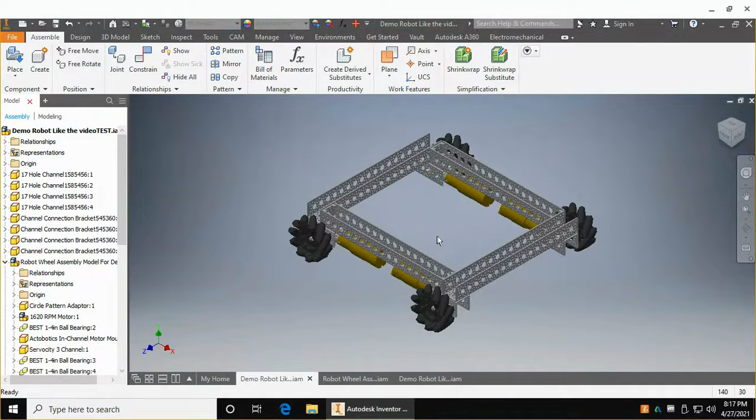In today's episode, we'll be adding our wheels and drive motors, and this is what our assembly looks like. So at the end of the last episode, check that out if you haven't, we had this here, and this is where we're going to get by the end of today's episode. So, to get all of the parts required for these assemblies, I've actually made a little slideshow that'll show you exactly what we're going to need.

So, what you'll need to do is follow the very same process you followed in the last episode to download your parts. If you haven't seen that, I really recommend you check that out. It has important beginning CAD information, and you'll also learn how to build that chassis we just saw.

So, we have, can I move this? Not really, okay. Anyway, we have, stay there, okay.

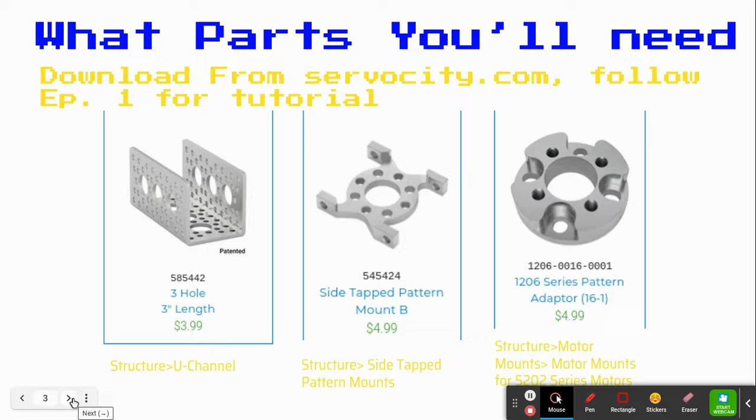We have our structure, U-channel. We're gonna need a 3-hole length of U-channel. We're gonna need structure and side tapped pattern mounts. We're gonna need side tapped pattern mount B. Also going to need structure motor mounts. Motor mounts for the goBILDA 5202 series motors, and this is the 1206 series pattern adapter. All of this can be found at servocity.com. You're going to need the step file downloads. Again, more information in the previous video.

We're also going to need, from the motion, motors, goBILDA 5202 series. I just put the 312 RPM one. You can pick whatever you want. They're basically the same in terms of the CAD model. You're also going to need the 1/4 inch D-bore set screw hub. That can be found in motion. Hubs, D-bore, 1/4 inch, and then set screw.

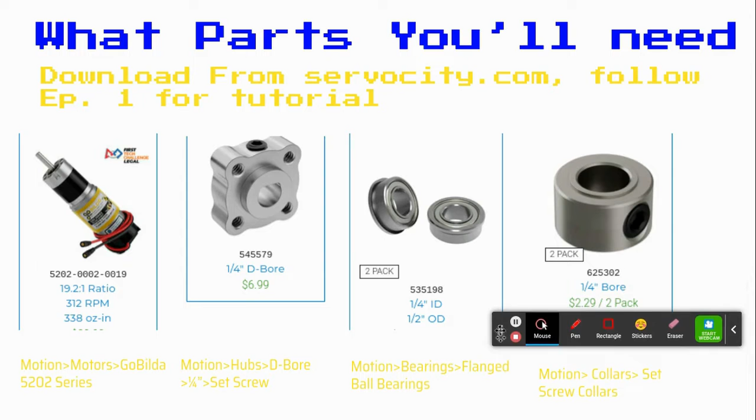You're going to need, in motion again, bearings. Flanged ball bearings, and you're going to need the one that says 1/4 inch inner diameter, 1/2 inch outer diameter, and finally you're going to need, for this slide at least, motion collars, set screw collars, and that's the 1/4 inch bore. You'll find that in that category.

You're also going to need the mecanum wheel set from goBILDA. That's in motion, wheels and tires, mecanum wheels. It's the only one there as of current. However, in the future they might have more offerings, so just make sure it's the goBILDA kind. That's the number

3213-3606-0002. You're also going to need motion gears, bevel gears, 20 pitch steel. And that's a bevel gear, 1/4 inch bore pinion, 1/4 inch bore spur. That just means it'll fit on a 1/4 inch shaft.

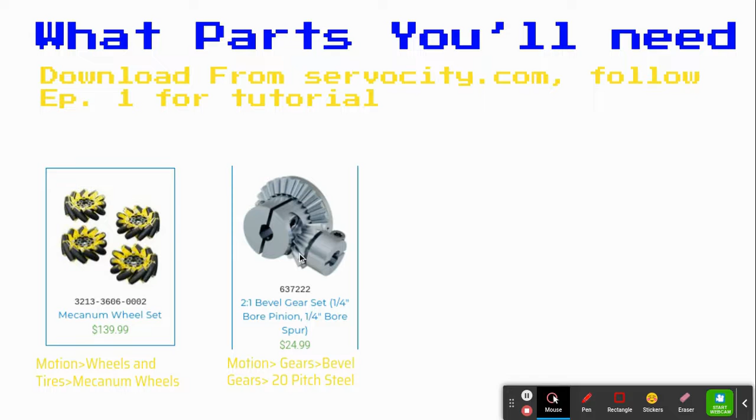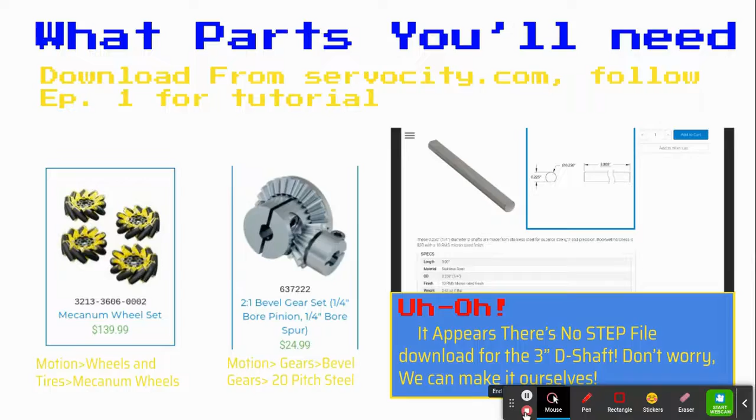You're also going to need some D shafts, so that's what I'll go through there to form the shaft. But they don't actually have a step file for that, so you're going to need to make your own. But don't worry, that's pretty simple. We can do it ourselves. So let's get started with that right now. The 1/4 inch D shaft. So we can do this.

I just brought up the technical drawing on servocity.com for the part. So you can see it's a 1/4 inch circle and then a line 0.225 inches below the top of that. And this is from a different side. That just means this shape is extruded to be 3 inches long. That's exactly what we're going to make in the CAD program.

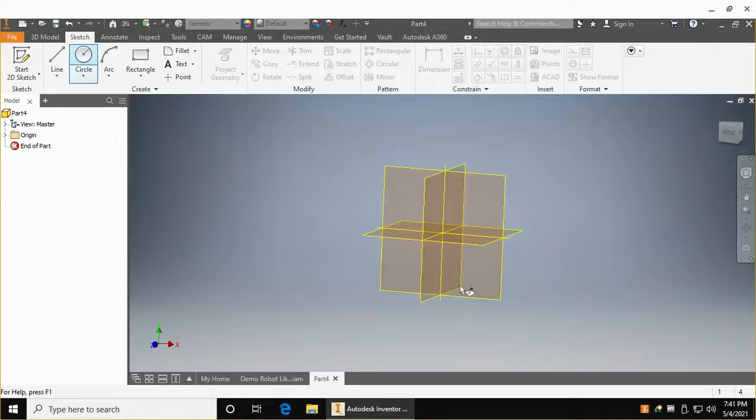So we can click here. We're going to make a new part. We're going to click OK on that one. And the first thing you need to do whenever creating a new part is make a sketch. We're going to select the center point circle on the XY plane. And then we're just going to go 0.250 inches, just like that. And now we have a 1/4 inch circle.

And then we're going to align this to where it says 0.125, because that's where the circle is. I'm just going to extend that out just a little bit. We're going to click OK. Right click to get up that menu, and then click line on the top, or press L.

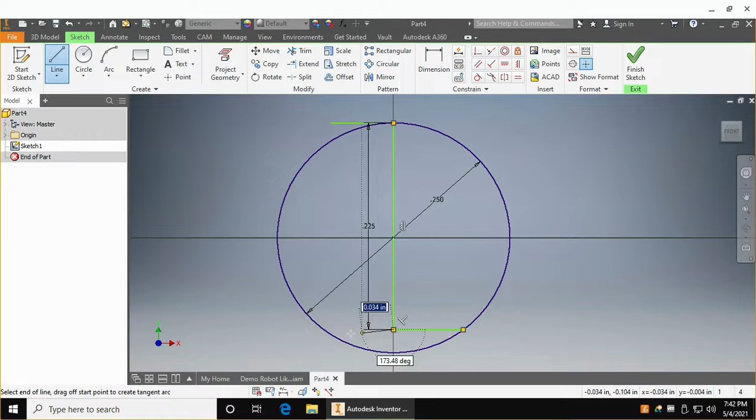Go down here. You're going to want to type in 0.225. You can just type that right in as long as that box is blue. And drag this out to the side, 0.075 inches. And do the same going from that green dot that'll pop up. And it should be 180 degrees like that. Okay, now you're going to right click here on the circle somewhere until you can get this delete. You're going to want to delete that.

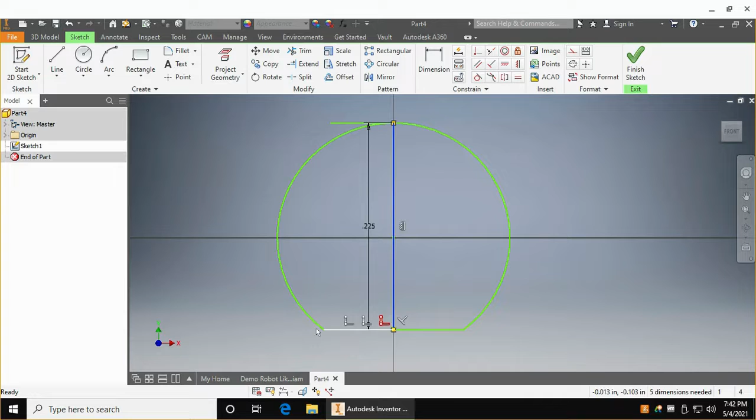Now we're going to use the 3-point arc. So we're going to go from this end to this end. That's how it works. And then we're going to extend that all the way up to there. And there we go. Now we have the 1/4 inch circle with this line cut off the bottom. Then we're also going to just have to quickly delete this line in the middle. Don't click construction. Just delete right there. And delete there. Okay, finish sketch, because that's the shape we need.

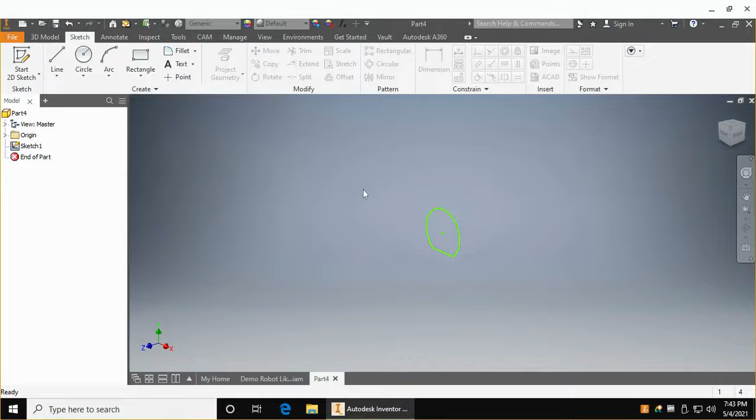Okay, now we have a sketch, right? In theory, those should be joined. And we're going to extrude that. We're going to type in 3 inches, because that's how long we want it. I'm going to click OK, click the home button, and as you can see, we now have a 3-inch long piece of shaft. That's nice.

The final thing we're going to do is we're going to click Control S. You're going to save this to the exact same place where you saved the rest of the robot. We're gonna go here. This is my CAD demo. We're going to call this our 3-inch D shaft. And then save. And now we can use this to assemble the wheel assembly.

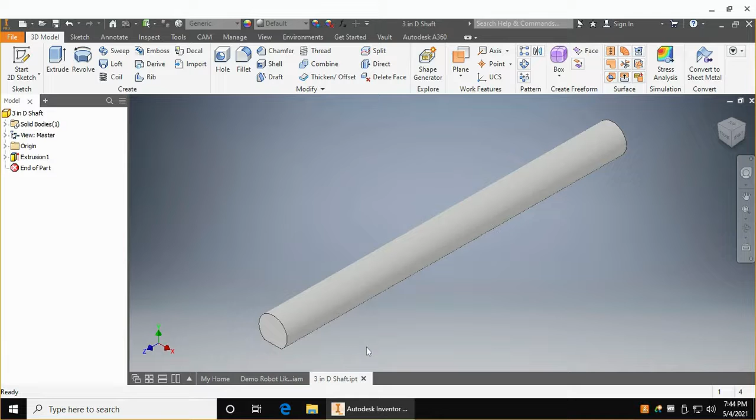Okay, everyone, I finished downloading all of the parts from servocity.com, so we could get building right now. Just a few things I want to mention. You can delete those step files once you are done with the conversion process. It'll just make your folder a lot neater. Number 2, there's a couple of things in here that you did not specifically save. Those are things like the wheels, the motor, and those bevel gears. They are assemblies, so they have subparts. Don't touch any of them. They're all fine exactly the way they are.

One thing I wanted to mention is when you downloaded the Mecanum wheels, you should have noticed there were 2 step files in those. Open them both separately. The reason there are 2 is because Mecanum wheels have diagonal lines on them. Some of them go one way, some of them go the other way. So they just include both. I saved both, so as you can see, we have goBILDA Mecanum A and goBILDA Mecanum B. That's just the wheel direction. I might use either one of them interchangeably, but if you want to be very realistic about your CAD-ing process, make sure you choose the right angle direction. With that, let's get on to assembling the robot.